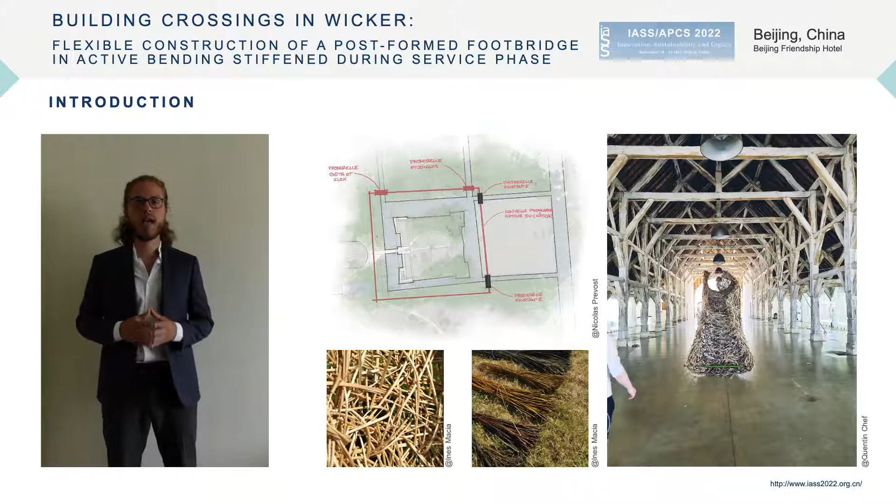To contextualize our research, we designed a footbridge for the first edition of the Utopies Constructives festival, which will take place in spring 2023 in the city of Richelieu, Indre-et-Loire, France, organized by the Beta. For this occasion, our team of students from School of Architecture Paris-la Villette and CentraleSupélec, with teachers from Construire l'Architecture, have designed a 12.8 meter span footbridge built in wicker.

Wicker is a natural fiber collected once a year during winter, which can reach 3.5 meters by young willow cuttings. It's a very minimal cultivation requiring limited inputs, maintenance, water consumption and CO2 emissions. Nevertheless, in France, the amount of willow plantation has drastically decreased from 25,000 in 1890 to only 400 during the 90s. The department of Indre-et-Loire, where our project is realized, undertakes action for the conservation of this craft.

Basketry has emerged very early in human history. The first traces of wicker objects date back to the Sumerian civilization, 4000 before Christ. And the first traces of basketry were found in Fayum, in Upper Egypt, around 10,000 before Christ. Everywhere on the planet, people began to weave natural fibers for the design of objects, clothes or shelters, thanks to local raw material and local know-how. Architecture and construction have slightly opened their doors to wicker work, but it's mostly limited to non-structural filling.

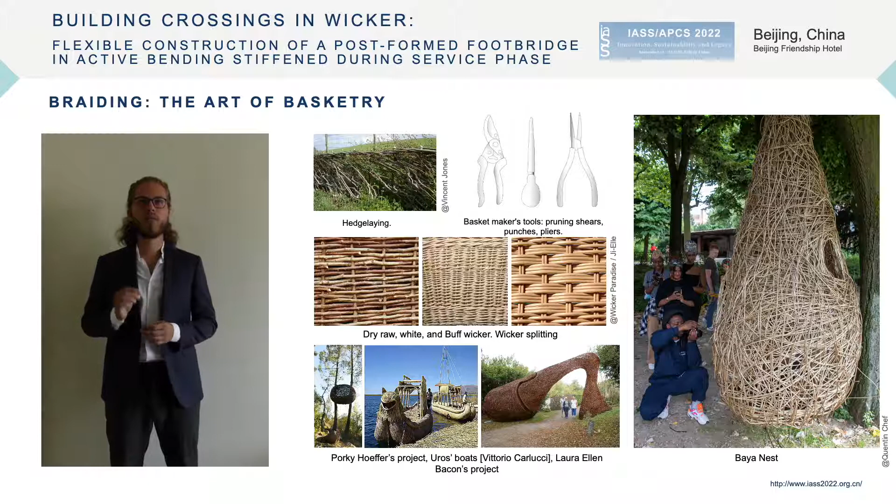Since 2021, a team of students and teachers from School of Architecture Paris-la Villette and CentraleSupélec has been developing the Baya project, an algorithm created to optimize the braiding of structural shells for architecture. We were thus able to identify obstacles to our crossing project. Durability: like timber, wicker is sensitive to UV, moisture, fungal and wood-eating insect attack. Evolvability of the material, which is creeping and becoming more brittle with time.

Node slipping: since Baya experiments, we know that the nodes of a full-scale project are slipping at each use, causing deformation of the structures under load-unload cycles. Lightness: usually, an arch must have a predominant self-weight in comparison with the live loads.

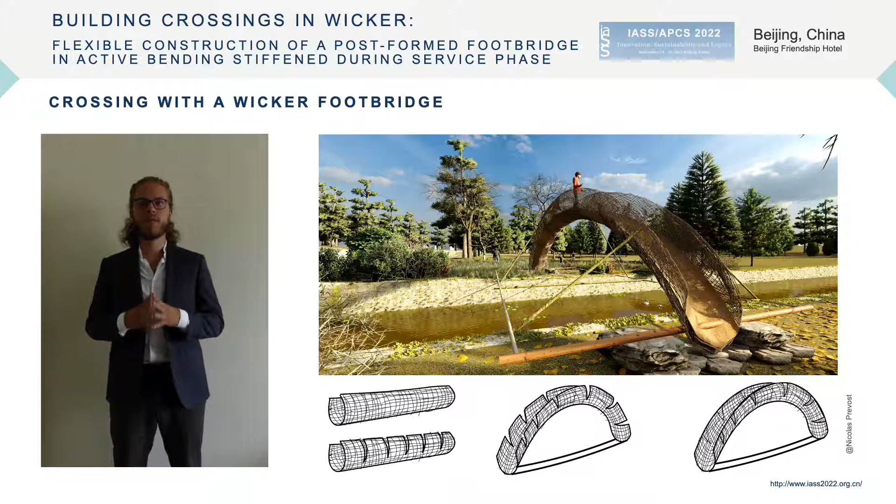To develop a braided wicker footbridge, we follow a general construction method based on the construction of post-form elastic gridshells. The object is first made by braiding the wicker flat and flexible. Then it's shaped by buckling thanks to the tension in ropes connecting the legs. Finally, the shape is stiffened for the service phase by stitching together the railings, forming a structural U shape 1 meter high by 1 meter wide.

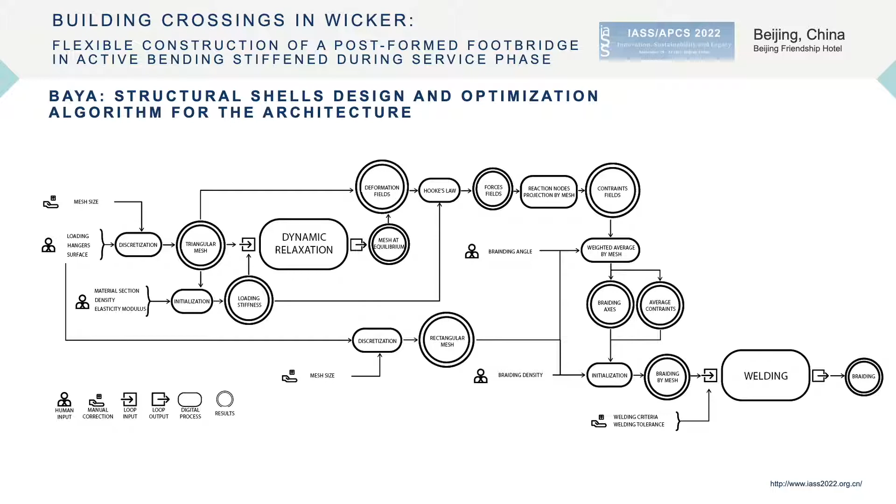The Baya algorithm determines the principal stresses for any shell under a given load. Thanks to the optimal braiding laws, it's able to give the ideal braiding for the shell. The algorithm can be applied to any loaded surface, including basketry items. We have chosen to illustrate its presentation on an isostatic beam on two supports loaded by a uniformly distributed force.

To determine the laws of an optimal braiding, we conducted numerical simulation by dynamic relaxation to study the reaction of a braiding specimen subjected to a field of principal stresses in compression and tension. The objective was to understand the influence of the different parameters such as value of the force in each direction, braiding densities and orientation.

The shell surface, the position of the support points, and the loads are the input data of the Baya algorithm. The surface is discretized into small rectangular isosceles triangles, each representing a finite element of it. Then we calculate efforts in the finite element edges by dynamic relaxation, and we deduce from it the principal stresses in the finite element. By using the laws defined previously, we eventually obtain the optimal braiding of the shell.

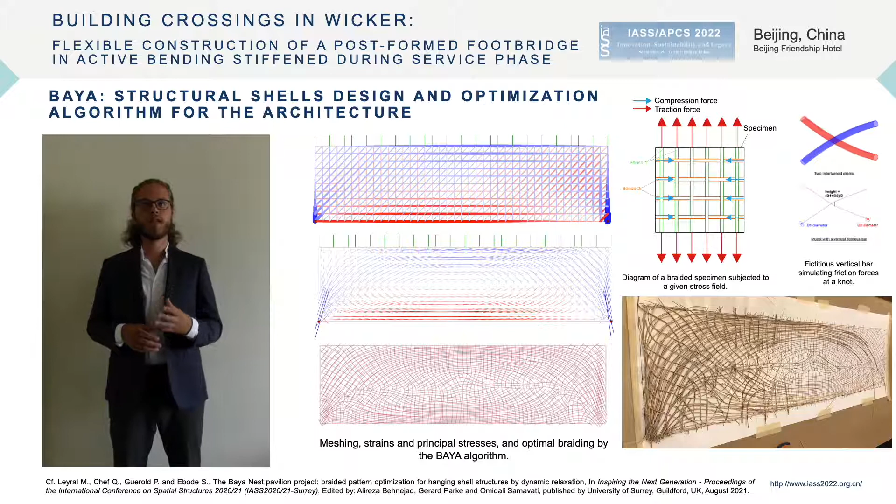Once we manage to demonstrate the constructive feasibility on small-scale models, we compare our structural design to the results of our experiments. This step is necessary because Baya does not take into account a certain number of parameters, such as knot slipping, buckling, overturning, and the calculation of the deflections.

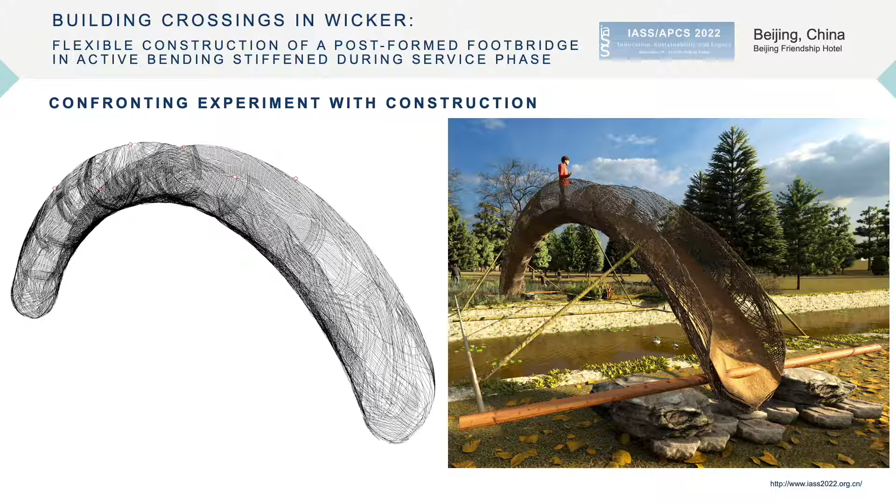Therefore, we built a 1/5 scale model and tried to anticipate the structural failure modes that could ruin the footbridge. We have selected 5 of them in the first instance. M1 is wicker failure by traction. M2 is wicker stress failure by compression. M3 is local wicker failure by buckling. M4 is failure by global buckling. And M5 is warp failure by traction.

M1, M2 and M3 failure modes are normally taken into account by Baya. We have calculated them with a maximum load equivalent to the weight of 4 people on the real scale footbridge. It's important to point out that these failure modes are very sensitive to the variations of the position of the funicular in relation to the neutral fiber of the section.

We then ran loading tests on the model, adding at each step 4 kilograms concentrated at the center of the arc, modeling live loads, and 4 kilograms uniformly distributed, modeling additional dead loads. The deflection at the center of the bridge is measured at each increment. At 12 kg, the bridge was fully unloaded and the deflection measured. The loading continued in the same way until failure. We then ran a second test with the loading concentrated at the center.

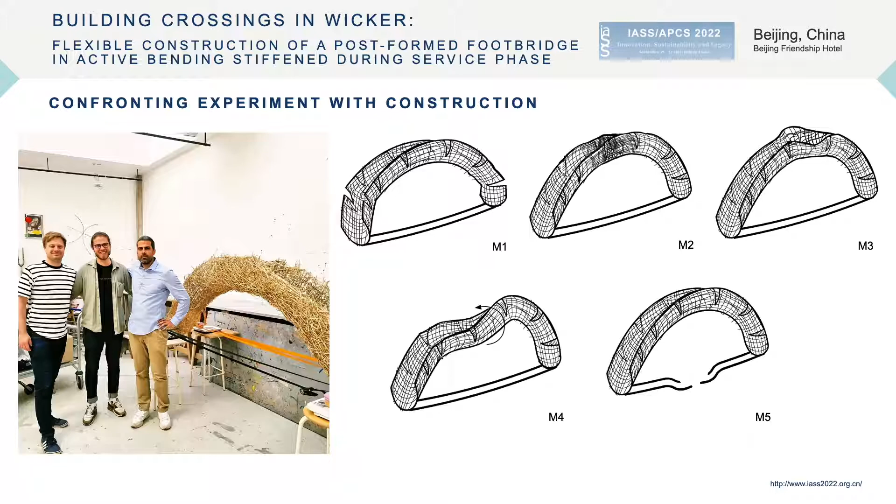The results of these first 2 loading tests are: as designed, the 1:1 footbridge should support only 1 person's weight of 94 kilograms. The failure is due to overall arc buckling, the only one that we could not precisely forecast by calculation. The hypothesis of classical arc failure mode is challenged by the fact that wicker is capable of resisting tension, unlike a masonry arc. In this context, the experience showed that the ballasting of the footbridge is not an asset.

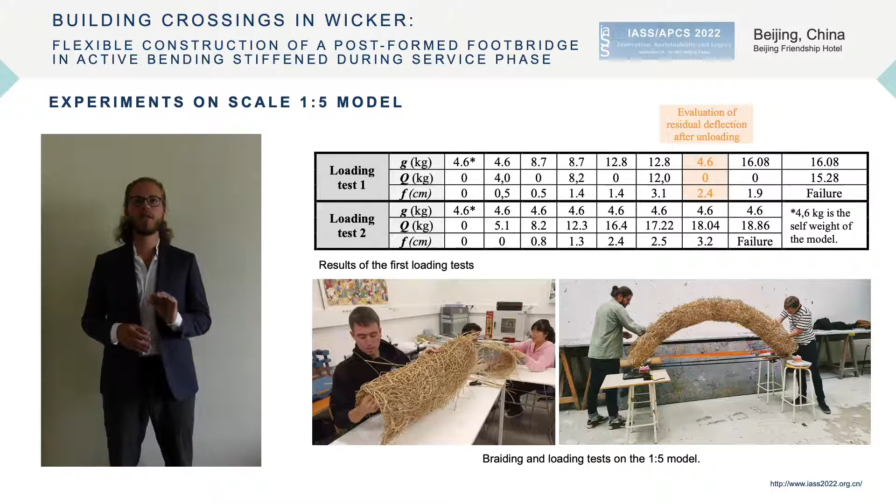In order to increase the load capacity of the structure, we decided to add anti-buckling bamboo tubes between the deck and the ropes. A second loading test is carried out on this new design. We note that, once modified, the footbridge should be able to support the weight of 2 to 3 people, so approximately 220 kilograms. The main difference with the numerical prediction, 400 kilograms, is that in the numerical prediction the load was divided into 4 loads of 100 kilograms, almost uniformly distributed on the length of the footbridge. Therefore, the physical model confirmed, rather correctly, the Baya numerical model.

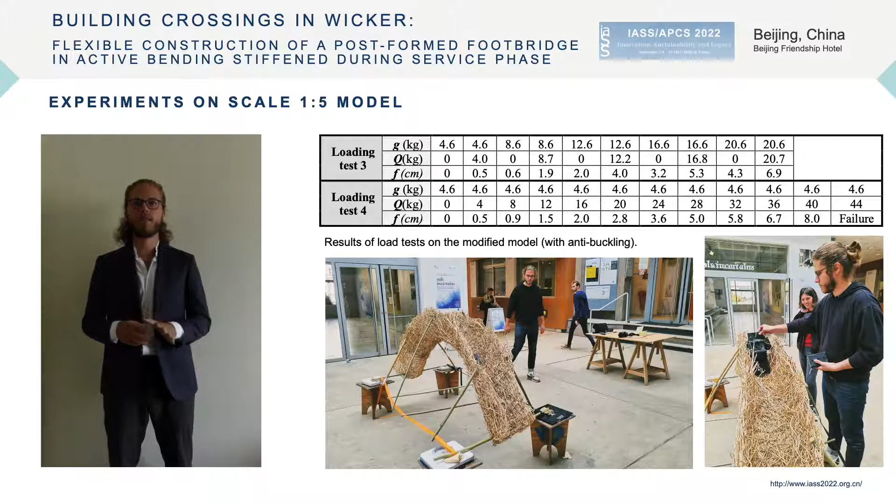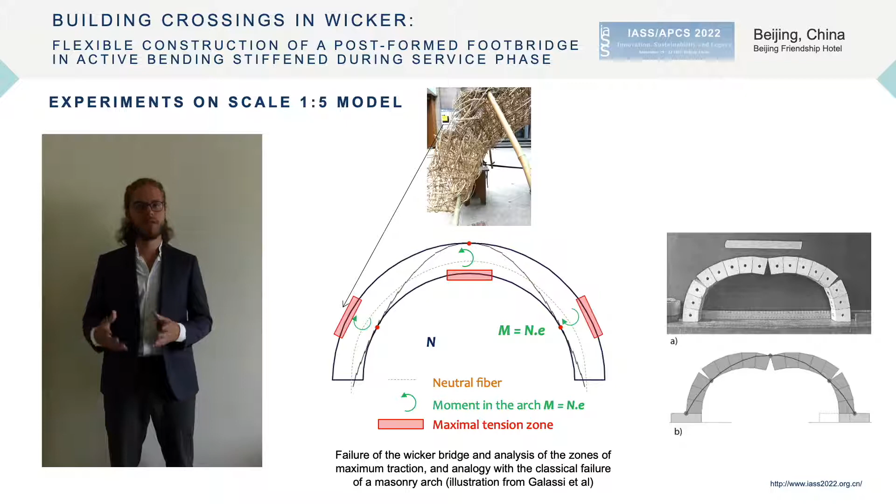The failure mode is M1. The failure occurred on the extrados at a stitch between module 1 and module 2. The local traction is maximum close to the base of the arc as is expected in a classic masonry arc, because the position naturally taken by the funicular is an arc, that's a passive thrust. A rounded braiding wicker handrail will be added to the 1:1 scale to take up the traction on the extrados more efficiently. After these studies and experimentation, we have begun to build the footbridge at 1:1 scale.

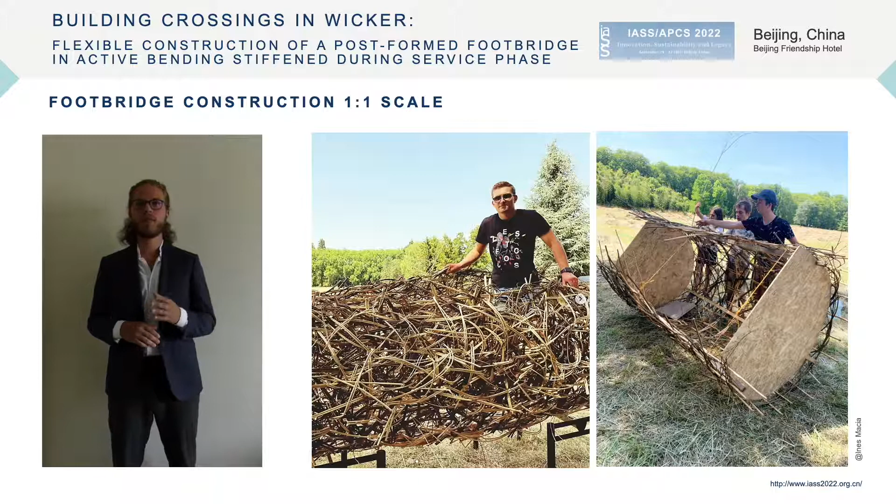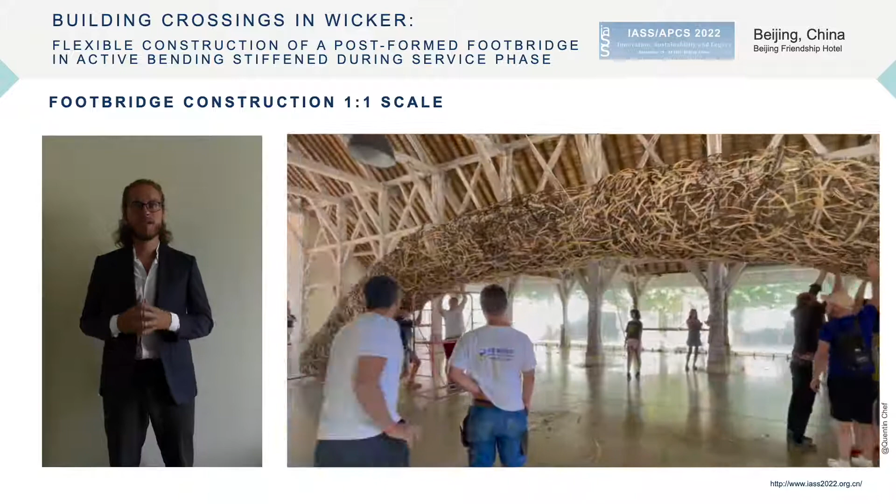The construction is divided in 3 phases. The first phase is dedicated to the construction of the 6 parts of the footbridge, following the plans provided by the Baya algorithm. The second phase is dedicated to braiding a link between the 6 parts to shape by buckling and to reinforce the interruption in the railings and stitch it together. The third and last phase is dedicated to the finalization of the structure by adding the final levels of wicker until we get 500 kilograms of wicker, and to build a rounded braiding wicker handrail to increase the structural resistance. We already advanced to the third phase and we hope to finalize it by the end of the year.

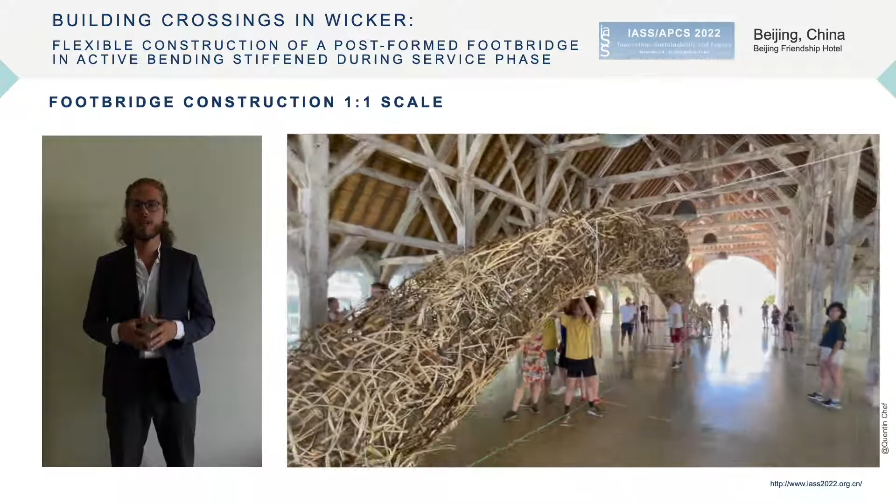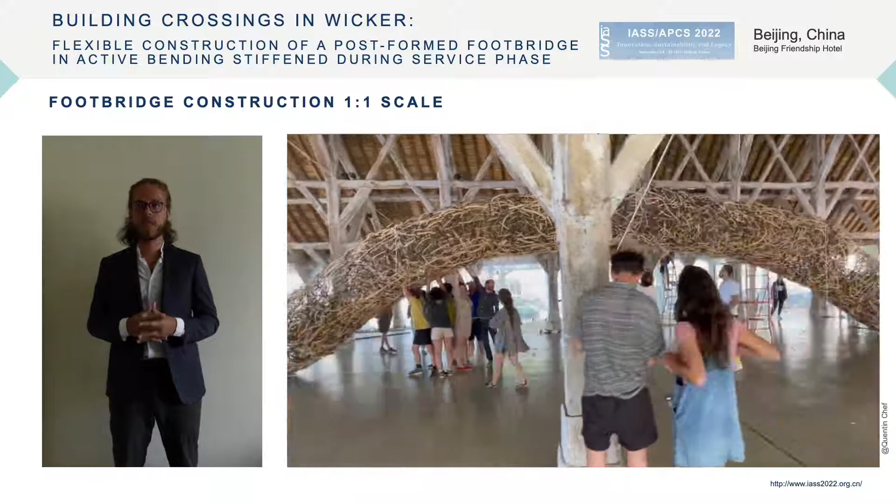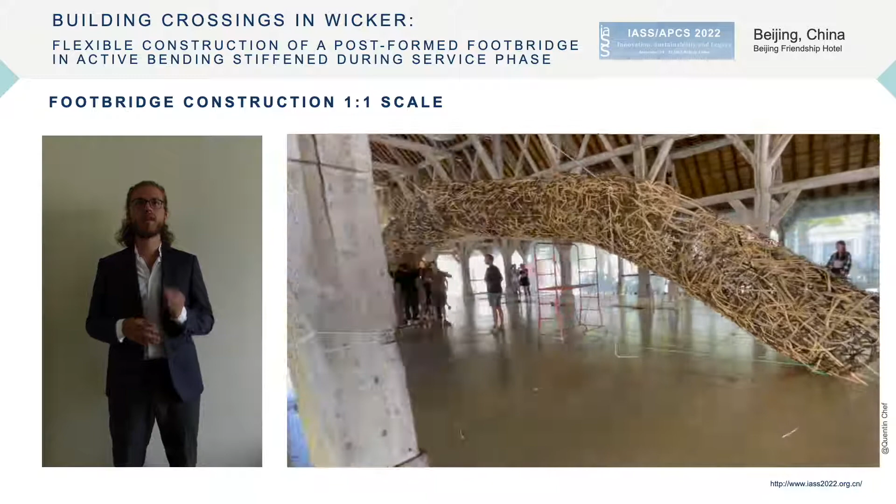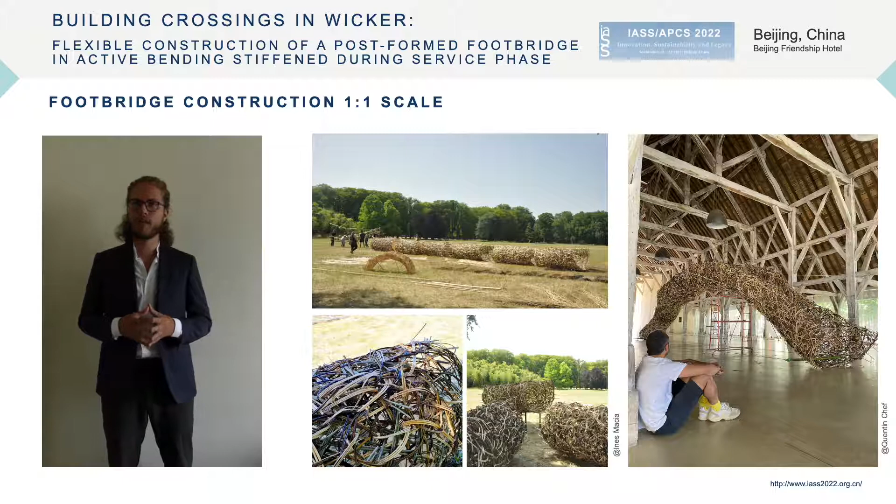To conclude, our footbridge used 500 kilograms of material and it's made of 90.1% wicker. In order to make a 100% wicker footbridge, we should explore a tubular shape, wider and therefore more stable regarding buckling. At the end of the 1:1 scale construction, the data will be analyzed to develop an innovation of Baya, capable of calculation on global buckling, on the deflection, and taking into account the slip of the braiding nodes. After that, the contributions of the study of the wicker crossing will be transposable to other structural shell projects for architectural use.